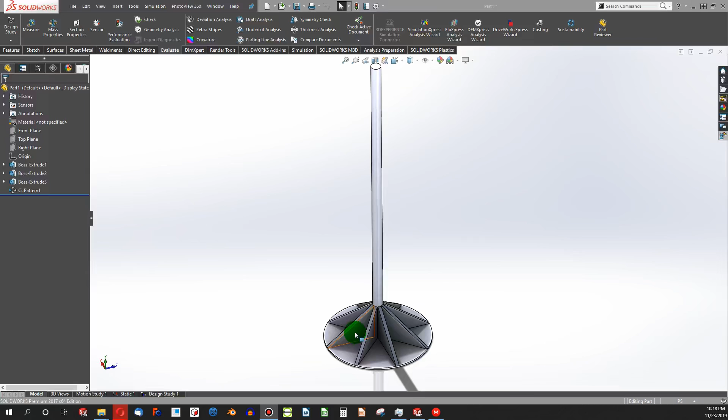So let's say that I've got this trash packer right here, and I want to be able to optimize this for the smallest amount of weight and still have it be able to take a certain amount of force before failure. What can I do? Well, I can vary the gusset thickness, the gusset angle. I can vary the number of support gussets. I can vary the bottom plate thickness, perhaps something in the handle.

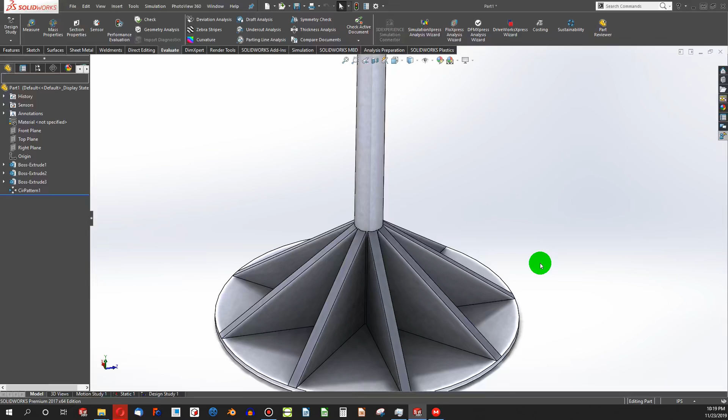I have all these variables that drive both the strength and the weight of this part, and optimizing all of those variables is quite a challenge. This is a video on how we can get SolidWorks to do a bunch of the work of that for us in optimizing this part by weight while still meeting a minimum amount of strength.

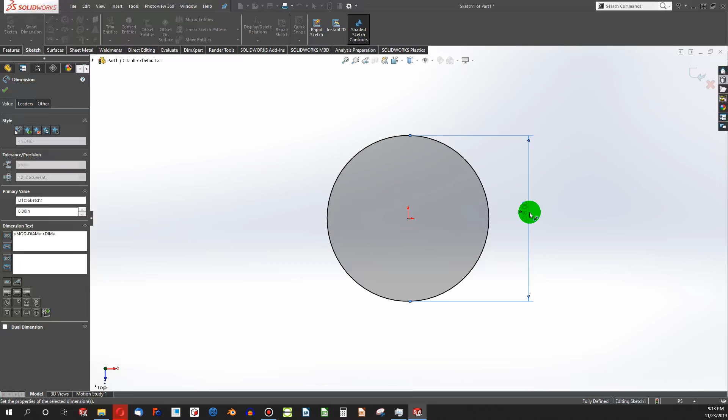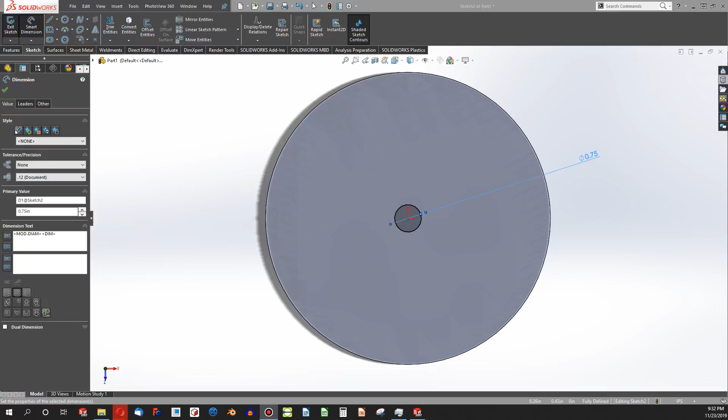And from here we're going to start on the top plane. We're going to make a circle and give it a diameter of 8 inches. Let's start with an 8-inch circle. We can extrude this to 0.25. Starting a sketch on this face. We'll make that, say, 3/4 of an inch. Yeah. And then we're going to extrude, let's say 25 inches, and done.

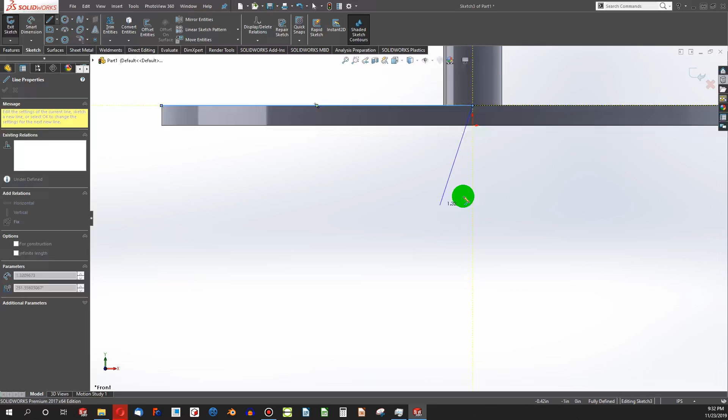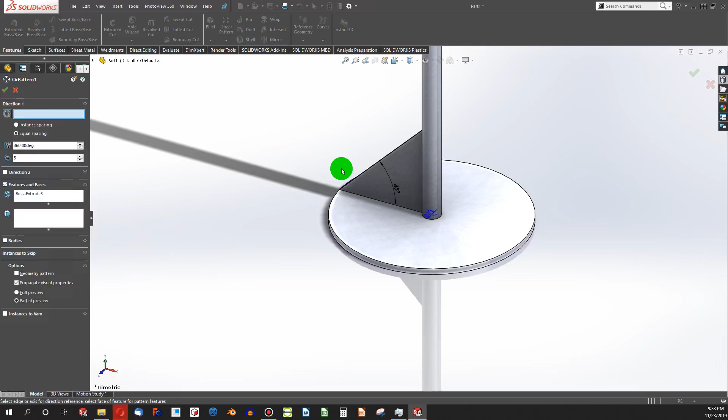Now we can go onto the front plane, sketch from the edge to the midpoint up here and back, and then we simply give it one angle. 45 degrees will work. Extrude mid-plane, do 0.125 or 1/8 of an inch, and done. And then we can circular pattern around this direction. 5 is good, and we're done.

So let's optimize this because we can vary these support gussets a lot, and we'll say we want to have the minimum amount of weight with the threshold of strength that is below the yield strength of the material. To do that, we'll need to go to our add-ins and activate simulation. That's, of course, a different license.

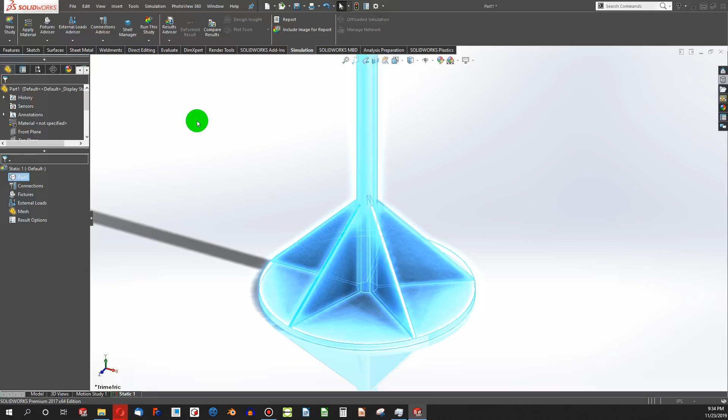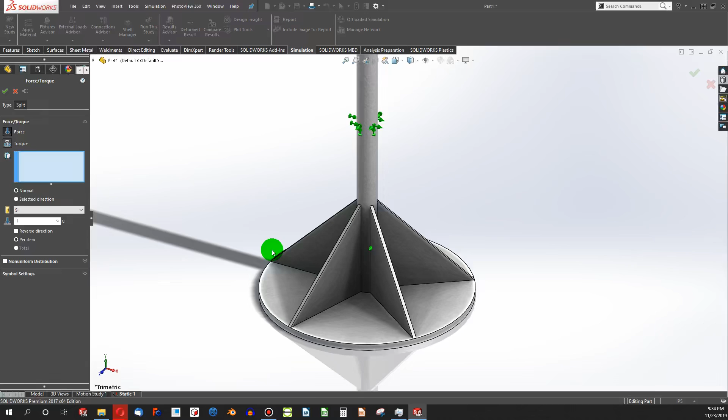So on the simulation tab, we can go to New Study. We'll do something like a static analysis, and we need to give this a material. ABS, and we'll indicate that the handle would be a fixed geometry. We'll make an external load as a force. We'll go English units. We'll do something like a 150-pound force on this face.

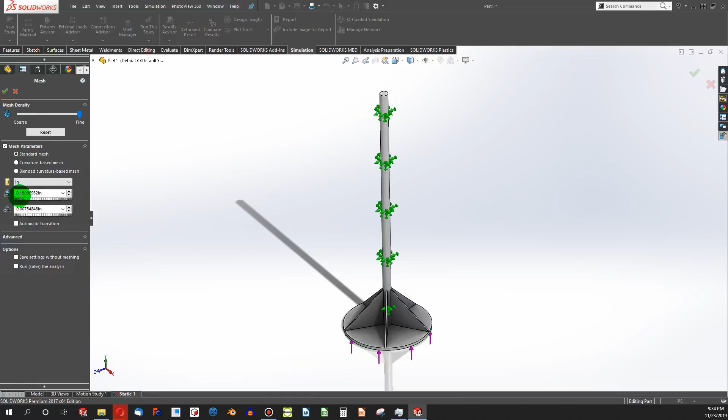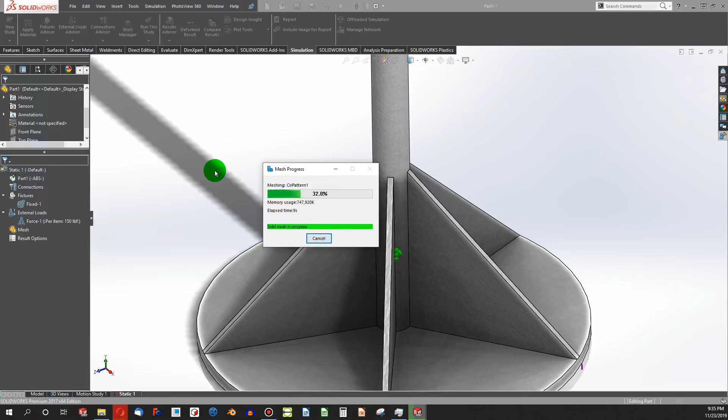And now we'll need to mesh. Oh, but I don't need the advisor. We'll create a mesh. We'll look at the parameters. Our rib width is 1/8 of an inch, so 0.150, we'll have to make that 0.1, and the smallest mesh is fine. We're currently meshing on a different monitor. There we go. Alright, so that mesh looks good.

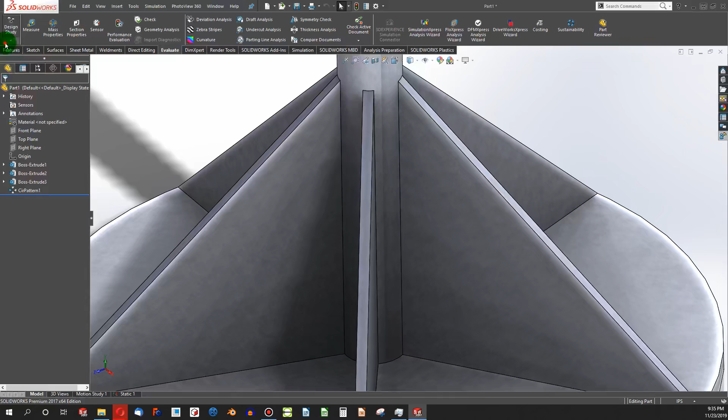Going back now to the model, we can go to the Evaluate tab, Design Study, and Parameters, and we can say something like rib angle. And if I double click on the rib that I've created, there we go. We can populate this. Notice when I click on the dimension, it fills it with 45 degrees. We'll do the same thing.

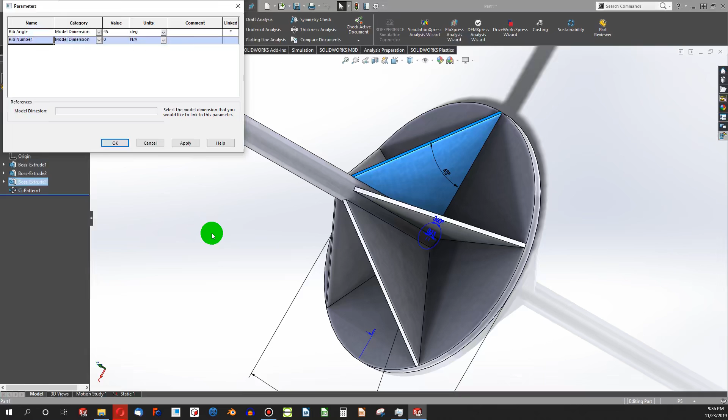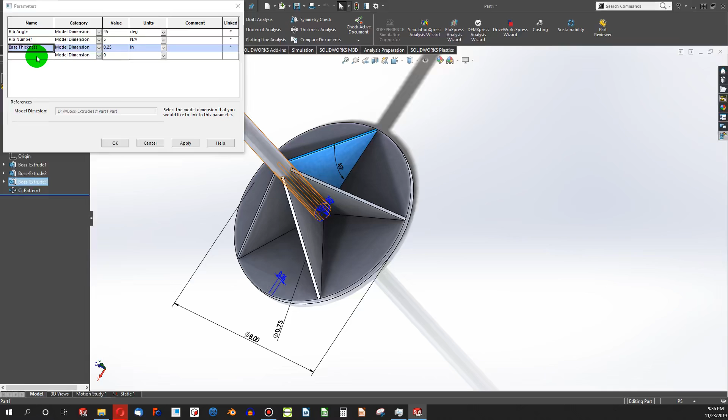I can say rib number as another parameter. And when I double click, I see the number 5 because I have 5 ribs. So that'll be another parameter that we can alter. I might want to alter the thickness of my base plate. If I double click, I can see the thickness there. I can say base thickness. And then finally I might want to also alter my rib thickness. Alright, so I come in here.

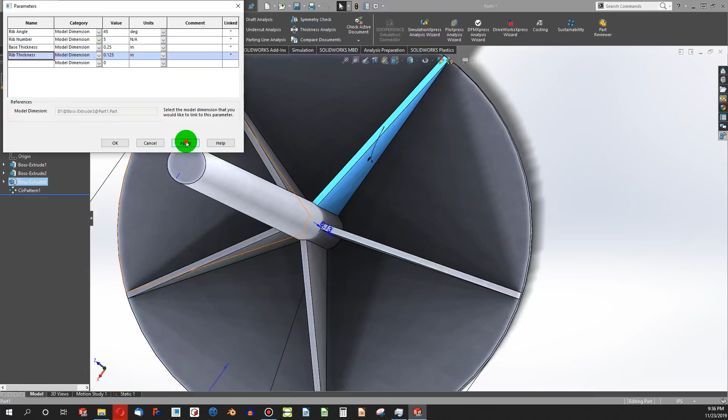Here's the thickness of my rib, 0.125. So I say apply. Oh, rib thickness. Apply. Okay. From here, let's go with

right-click, New Design Study. And here I've got variables, and if you look at the parameters that I just specified, I can choose my rib thickness first. And this is the parameters in which I can alter it. So I can say a range of values, and I can say the thinnest rib that I want is 0.125. The most thick rib could be 0.375. And it can range to any value in between these numbers.

I'll add another variable, base thickness. Again, I can choose a range of values. I can do my minimum as 0.125, my max is 0.375. I agree with both those numbers.

Let's go with rib number. Now this time, I can't just go to any value, I need to have whole numbers. You can't have 2.5 ribs, so I'm going to specify 3 ribs as my minimum, 8 is my maximum, and we're going to step 1 rib at a time. And that way we don't have any decimals for ribs. So this will step from 3, 4, 5, 6, 7, 8, in increments of 1. If I were to specify 2, then it should step 3, 5, 7, and 9 if we didn't have an 8 there.

Let's add another parameter, and that's going to be the rib angle. Again, I can use that as a range, and we can range it from 10 degrees to 65 degrees, anywhere between there, or whatever parameter I wish to set. Looks like we're fully defined now. The biggest thing is I don't want to have any features that are smaller than my mesh. The max size of my mesh is 0.1, my minimum feature thickness is 0.125, so we should be covered there.

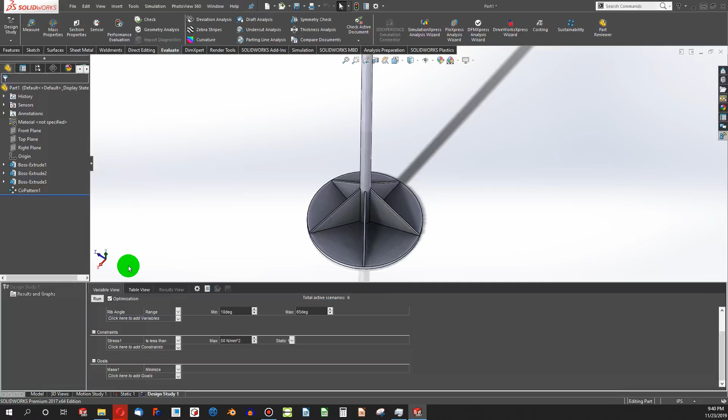Finally, we want to make a goal to minimize our mass. Mass comes up immediately. So mass 1, minimize mass of our part. You can add multiple goals if you want to as well, but this is good for the study that I'm doing. With the optimization box checked, I'm going to click on Run. This could be quite a long time to run, so be patient and let this thing do its thing.

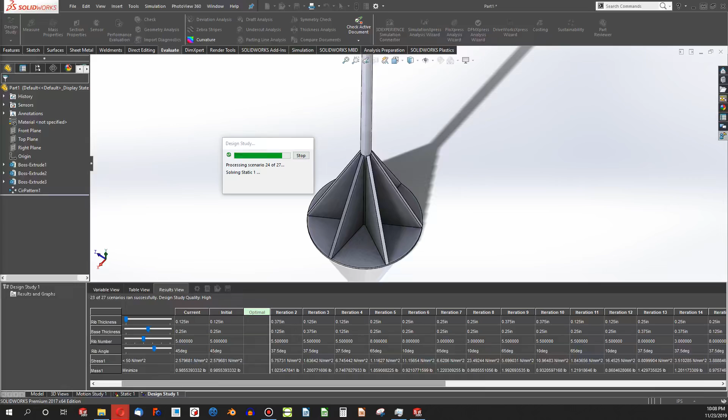Okay, with this simulation done, you can see it's delivered us an optimal configuration for what we've put in, and that's going to be low base thickness, low rib number, low rib angle, and a high rib thickness. These are all the different configurations that SolidWorks has simulated. Interestingly, none of them failed, which means that I could have typed in a much higher force. And you can, of course, activate every iteration that SolidWorks has tried by clicking on it.

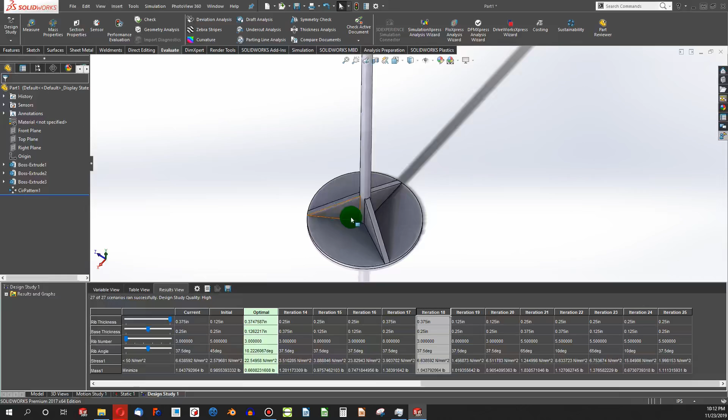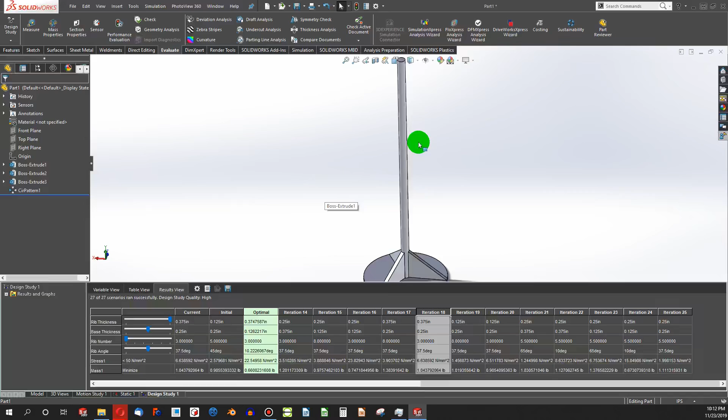Once you get this basic configuration that's optimal, you can change the parameters to be a little bit more specific. So I could try to do my ribs from 3 to 5 and specify less thickness settings and everything else to fine-tune an even more optimal thickness. But that is how you would do a design study, and a great way to optimize parts in ways that would take forever to try to analyze by hand.